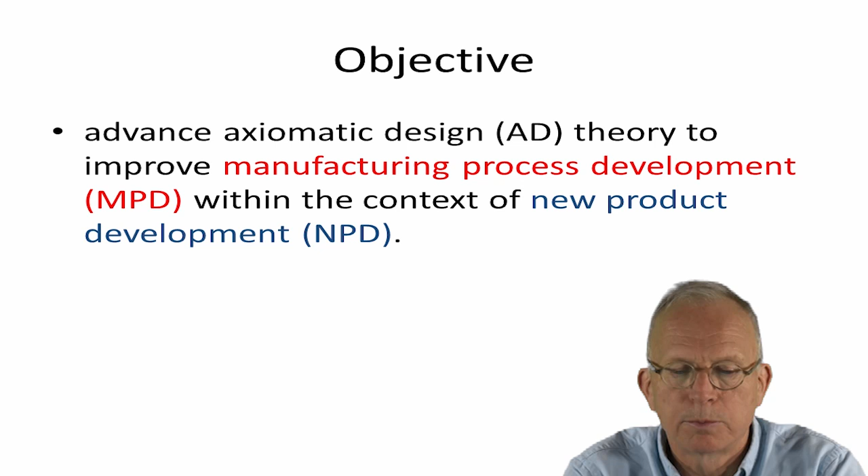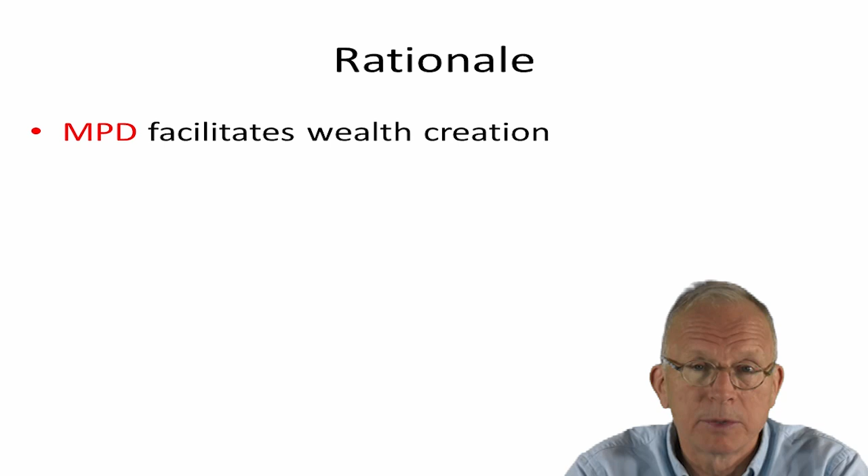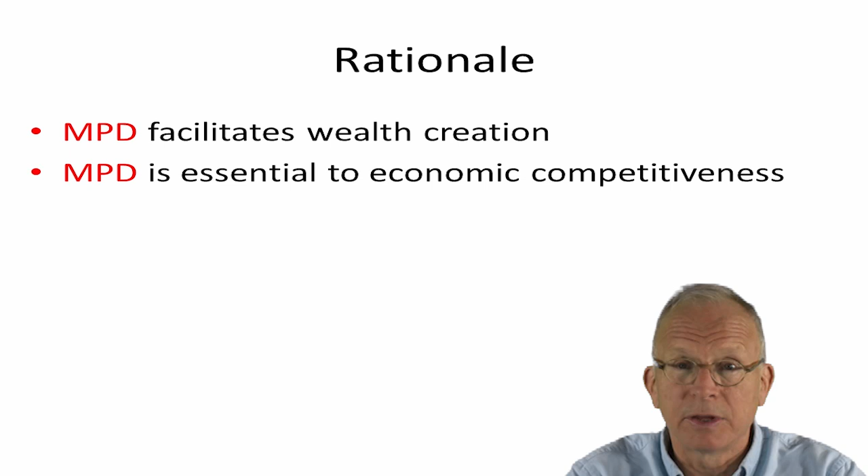This is important because manufacturing process development facilitates wealth creation. The better we do at developing manufacturing processes, the better we'll be at manufacturing, and manufacturing creates wealth. Manufacturing is key to economic competitiveness. If we can't do good manufacturing process development, we won't be competitive.

Traditionally, most of the manufacturing costs are already built into the new product before the manufacturing process development begins. This is unfortunate because it makes it difficult to manufacture things as cheaply as they could be otherwise.

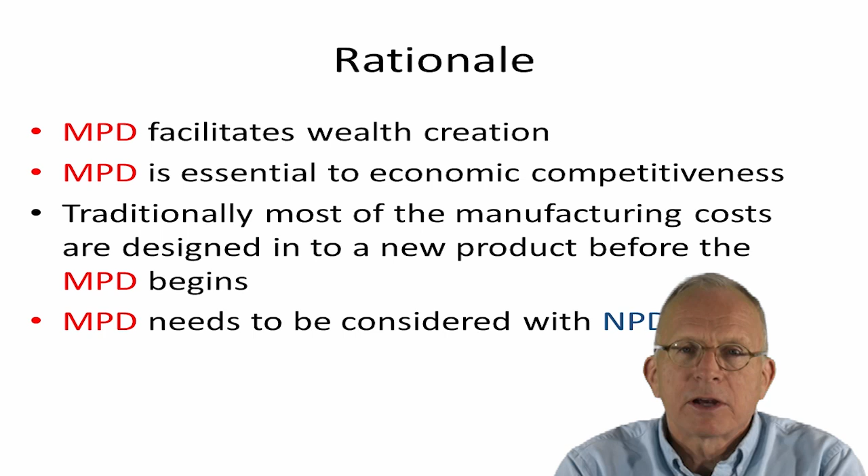So manufacturing process development should be considered along with new product development. The state of the art in this goes back to the 1980s when people started talking about concurrent or simultaneous engineering, meaning we should be doing manufacturing process design at the same time as we're doing product design.

This has been used extensively this way. The main thing is to get manufacturing engineers with the design engineers so that they could work together and make intelligent choices for the product based on the manufacturing process.

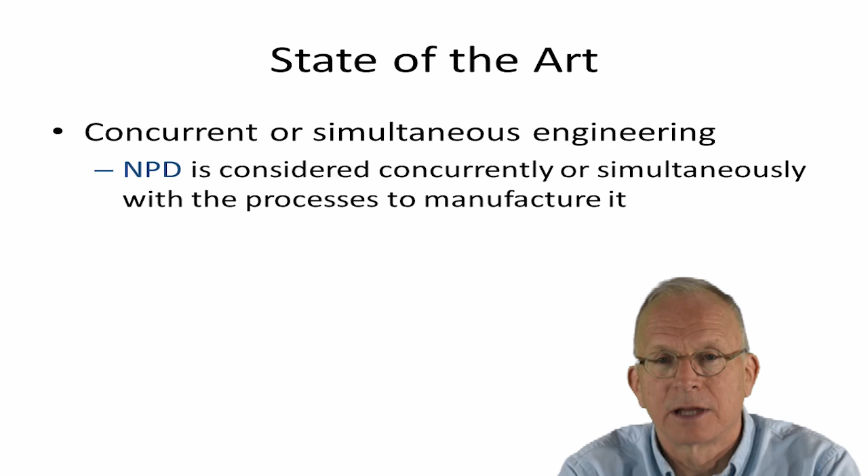So what we're going to be doing here is trying to advance the formalization of that in the context of axiomatic design and looking at different ways that this might be accomplished.

We're considering different configurations of the design domains and of the decompositions, trying to maintain independence and still be able to make the modifications. So we're here developing the theory of axiomatic design and extending the theory of axiomatic design.

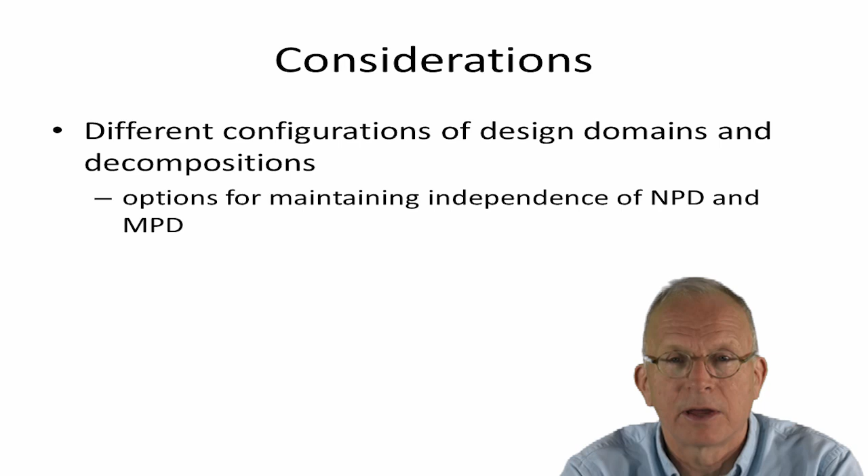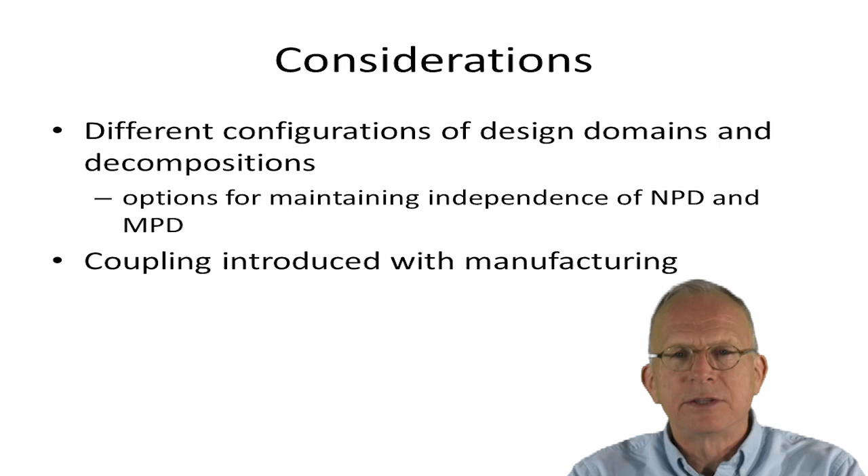So we can get into situations where coupling is introduced with manufacturing, and we can also get into situations where the manufacturing needs are not being considered when we formulate all of the process variables.

Another thing to consider is tool design. We don't always have the tools we need to make the products that we want to make, so sometimes we have to develop new tools along with new products and new manufacturing processes. We're going to look at how that could be formalized as well.

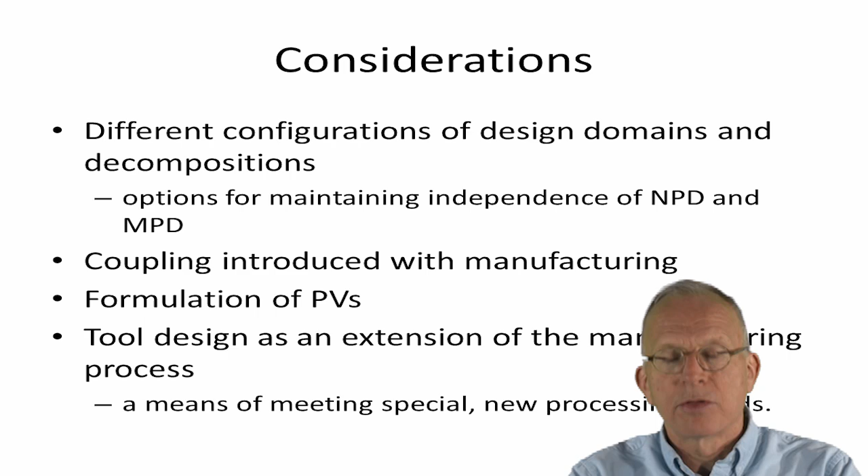First, though, let's consider an example problem that shows how coupling can be introduced into the manufacturing process development in the new product development. This is one of my favorite examples because I also do work on surface metrology, and this involves some interesting issues in surface metrology as well.

Rotating lip seals ride on shafts. This green element here is the rotating lip seal. It rides on a shaft, and what we're showing here is just half of it. It goes around the shaft, and the shaft is turning.

Things like internal combustion engines convert chemical energy to mechanical energy in oil-rich environments, and the oil needs to be retained inside the engine, but the power needs to get out, and we typically get that out through a rotating shaft.

Another place where these are used would be in hydraulic pumps. So the power, when we're getting it into or out of an oil-rich or fluid environment with a shaft, we need to maintain a seal around that shaft.

The roughness of the shaft turns out to be very important for the life of the seal, and so considerable work has been done on figuring this out.

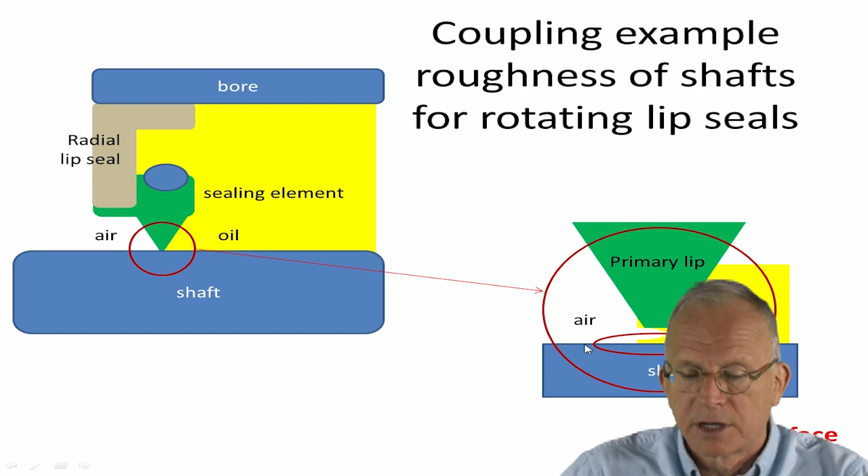The critical surface here that we're going to be studying is the surface on the shaft. Initially, the Rubber Manufacturers Association has 3 roughness criteria to specify the roughness of the shaft: average roughness, peak to valley roughness, and the peak height.

Your intuition on what these are probably serves you right. We have the arithmetic average, which is RA, and is the most commonly used roughness parameter. So we have 3 double-sided tolerances, making this one of the most toleranced rough surfaces there is.

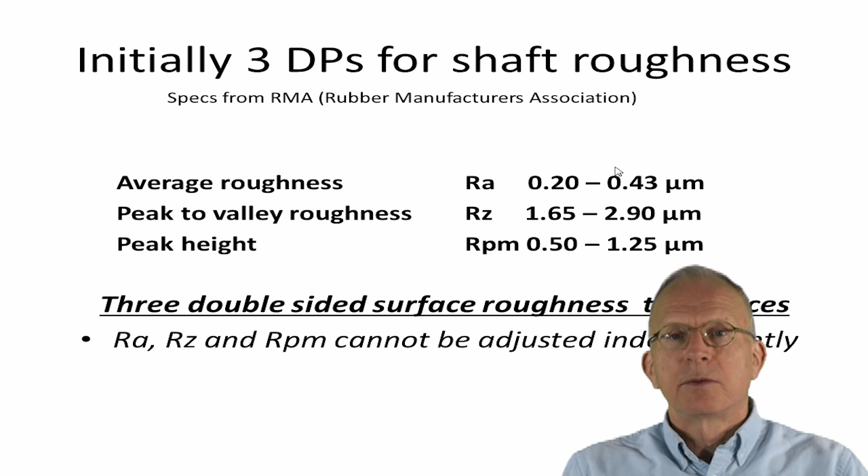Now the problem is that we can't adjust RA, RZ, and RPM independently. Let's see a little bit why. This is from a paper that I wrote about surfaces in 1990, and we're doing a cross-correlation matrix. We're looking at covariance here.

This was done previously by Nowicki from Poland, who suggested this as a way of looking to see what parameters might have more information about the surface that we would be interested in. Parameters that are highly correlated, for example RA and RZ, will have a high value here in the covariance matrix. So in this particular work, RA and RZ are highly correlated.

In fact, we can write an equation which is good to about 82%. In other words, if the R value is 0.9, we can square it and find out what percentage of the time RZ, the variation in RZ, can be explained by the variation in RA.

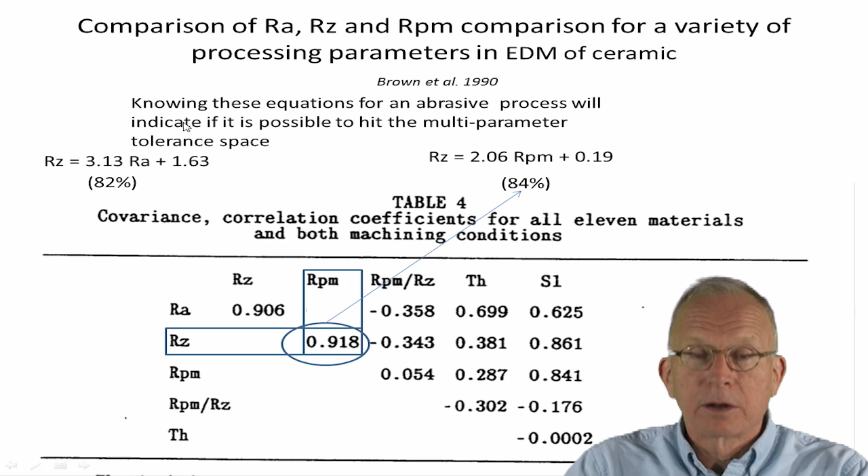Similarly, with RPM and RZ, those are also highly coupled, and we can also write a formula, and that's good for about 80 to 84%. So if it's possible to write these equations for the abrasive process we were using, it'll facilitate hitting this multi-parameter tolerance.

Let me illustrate how this works. So the peak to valley roughness is indicated here. Let's take another look at that. So this would be the RZ here, and then the peak height would be from the mean line to the top, which is the RPM.

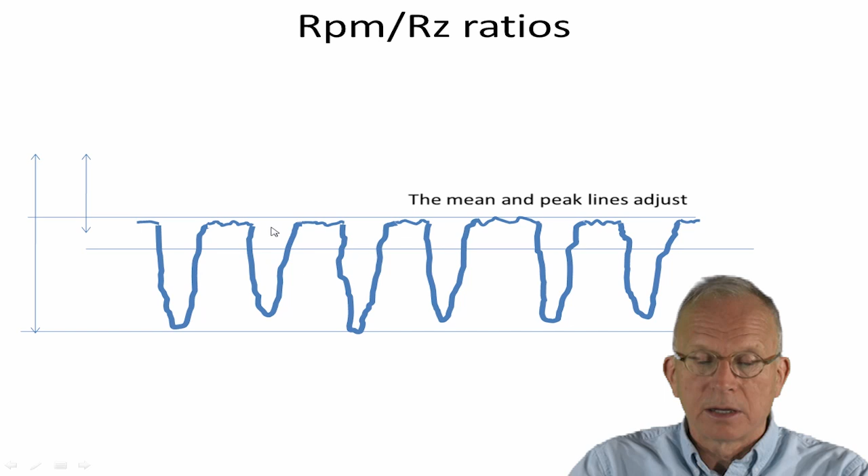If we, for example, remove the peaks, as we might on a honing operation of a surface that had a profile like this, then we would have this kind of surface. Now the mean line would have to be adjusted, but so is the peak height. So the RPM is very much smaller, and so is the RZ over here, the peak to valley. The ratio, though, is changed remarkably, and it goes from about 1/2 to about 1/4 in this case.

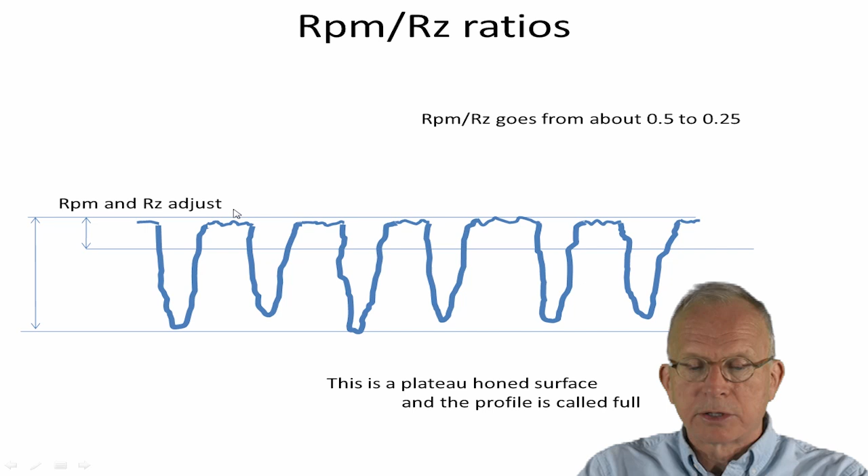And this kind of surface is called a plateau hone surface, and the profile is called full. It's a good surface for oil lubricated bearings, because the oil can go into the valleys and come out under pressure, helping to provide a hydrostatic interface.

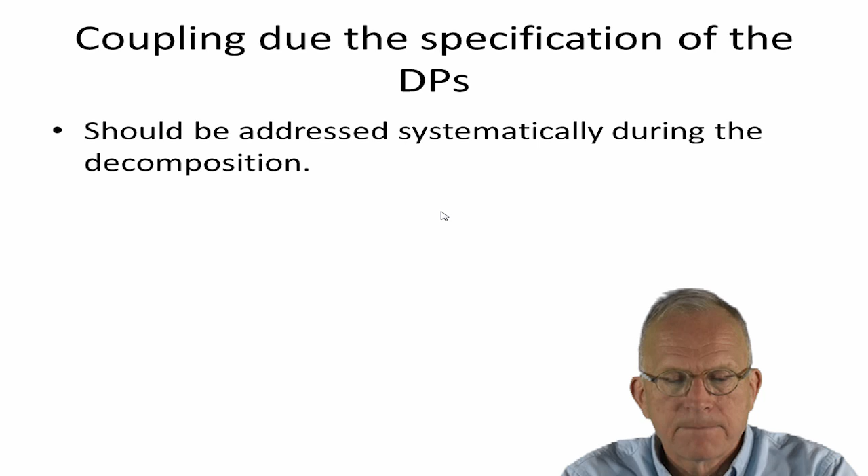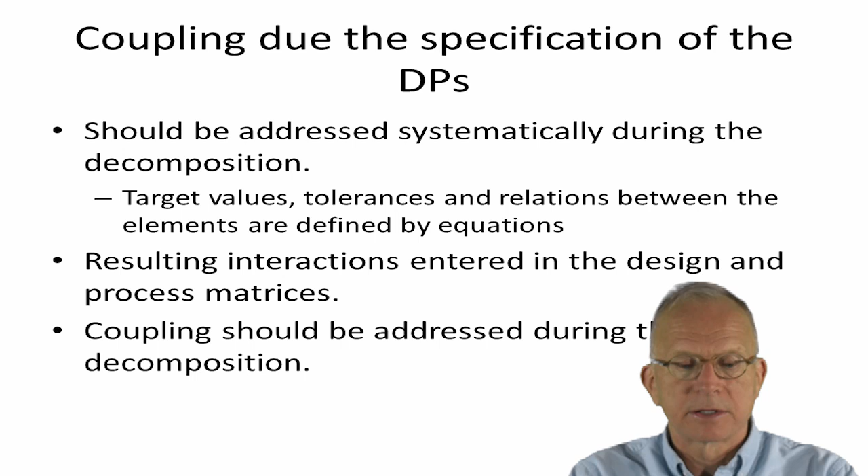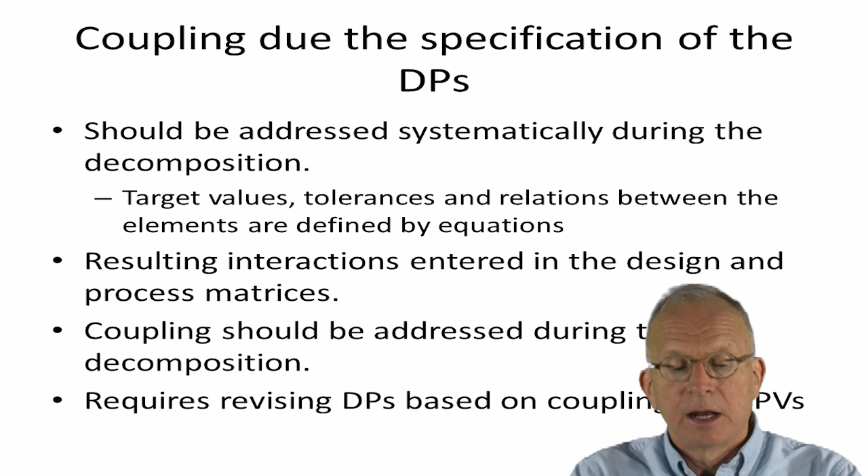So there's coupling, and because we can't change these independently, it needs to be addressed systematically during the decomposition of the design solution. To assist in that, target values, tolerances, and the relation between the elements should be defined by equations when we can do that. The resulting interactions can be entered into the design matrix and the process matrices, so we can see how best to manipulate those—we'll look at examples in a later module. So the coupling needs to be addressed during the decomposition, and it requires revising DPs based on the coupling with the PVs.

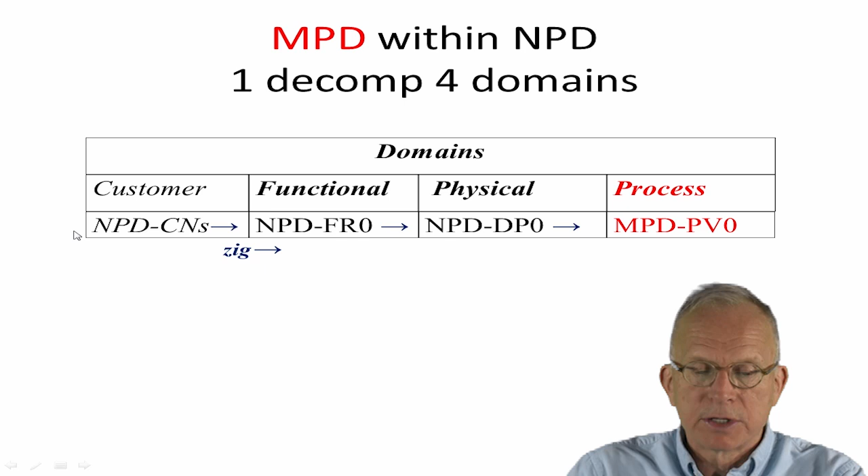So let's take a look at manufacturing process design within new product design: 1 decomposition and 4 domains. We're adding the process domain here. We zig over from the customer needs to the FR0, DP0, and then have a PV0, and this begins the manufacturing process design. Then we zag back across the physical domain all the way back to the functional domain, then begin another zig looking at the top level FRs, DPs, and PVs.

Then we would go down to the next domain, looking to see if any customer needs apply at this level, and we would continue like this until the design solution becomes obvious.

So we're co-developing the manufacturing process design, reacting to the physical. What we would have done in the previous problem would have been recognizing that we cannot change RPM and RZ independently, nor can we change RA independently of these. So we would go back across the zig and say, all right, we need to have a specification of the design parameters that will allow us to independently process these and produce them independently in the processing phase.

But let me go back here. In this particular case, there's considerable experimental work that was done to determine what the RA, RZ, and RPM values should be. And so then that would require going back to the experiment, actually going back to the way roughness is being defined in this case, to try to find new roughness parameters that would have this property of being independently adjustable in the process phase. And this is considerably more effort, of course.

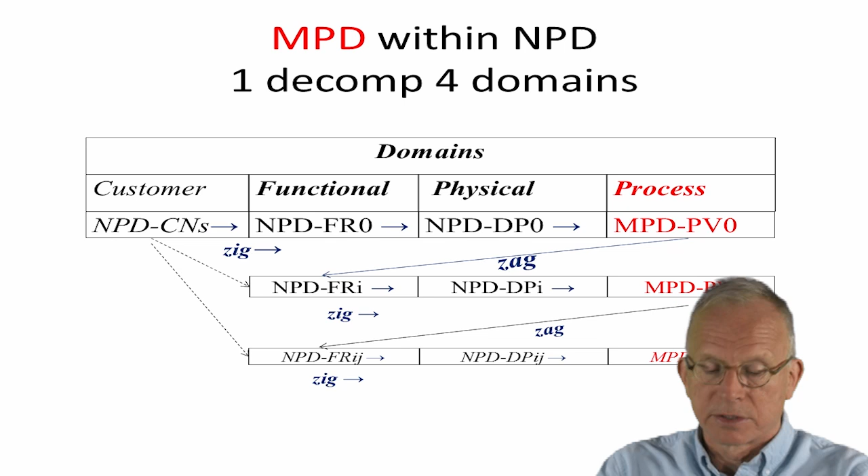So what are some of the difficulties? Well, the principal difficulty is there's nowhere to introduce the manufacturing requirements. And we previously discussed what manufacturing requirements are: manufacturing should add appropriate value and minimize cost. Now, I've shown minimize cost here as a selection criteria. After studying Thompson's paper, I think this is a better way to characterize the cost issue in manufacturing.

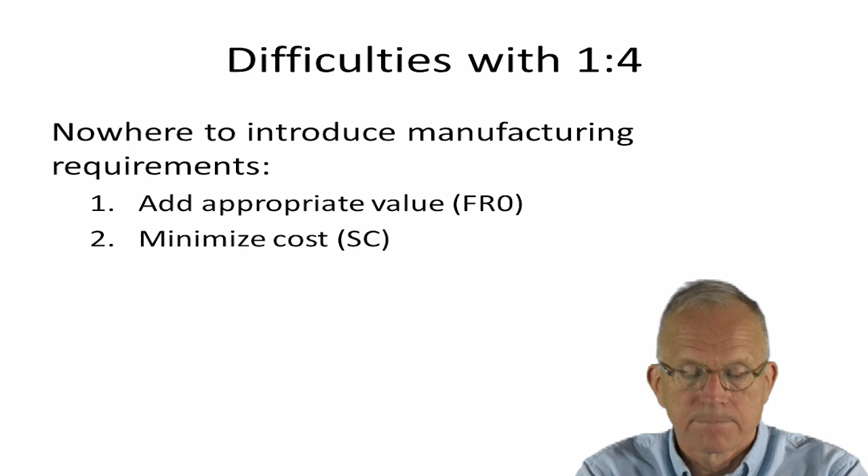So manufacturing process development, we could separate it then from the new product development in this kind of way. First we would do the new product development, going from the customer to the process to the physical domain, and we would stop with the DPs. Then we would zag into another decomposition. So this is 2 decomps.

Here we would start with the manufacturing process development CNs, which would be generated largely out of the new product development DPs. So we would use the DPs for the product to generate the customer needs for the process. And then we would develop the FR0 and the DP0 just as if this were a separate design, which in fact we're essentially doing. Then we can zigzag down to the lower levels, getting more detail on the manufacturing process. So here we've got 6 domains, and 2 decompositions. So essentially we could finish the new product development design decomposition before we begin on the manufacturing one.

Now, the problem here, if we think of the example of the rotating lip seals, is that there's no opportunity really to iterate back to the definition of the DPs of the surface roughness, which was causing the problem in the example. So this does not provide that kind of flexibility.

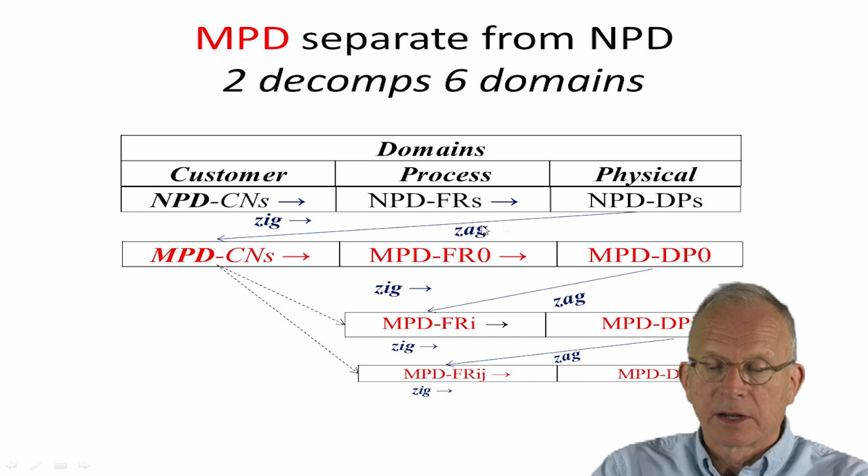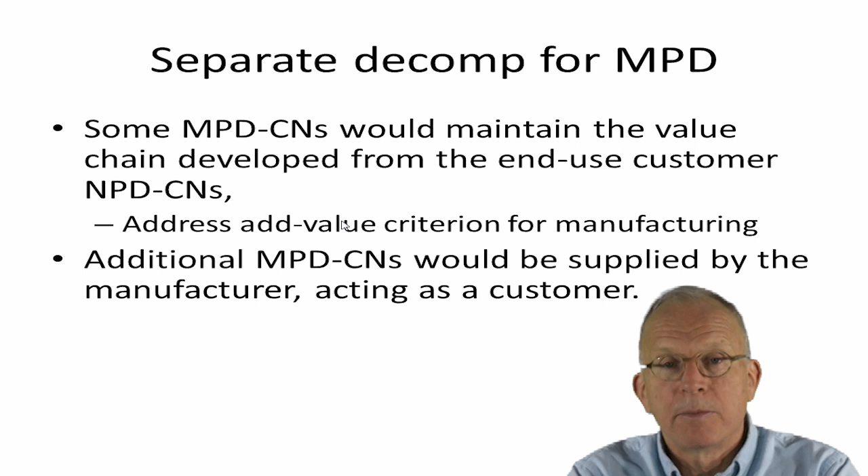However, we still need to trace the value chain back through to the end-use customer new product development CNs. We need to maintain those through the manufacturing process development so we don't lose sight of what's creating value. So we need to address the value added criteria in manufacturing this way. The additional manufacturing process development CNs would be supplied by the manufacturer, one of the stakeholders, obviously, acting as a customer or a stakeholder, as Thompson called them in this situation.

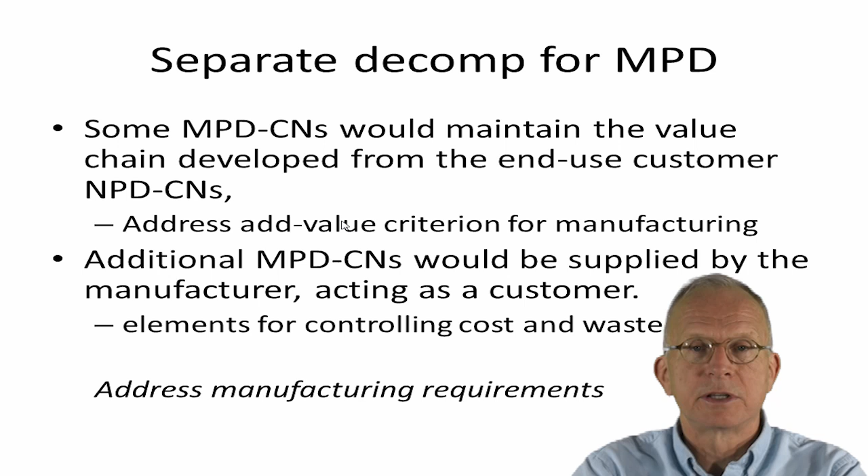So this would introduce elements for controlling cost and controlling waste. So therefore we would address the manufacturing requirements this way. However, we still would have the same sort of coupling with the shaft and with the roughness, and not have an ability to modify that.

So essentially what we have here is sequential new product and manufacturing process decompositions. And this gets back to the problem essentially that initiated simultaneous or concurrent engineering, that we finish the new product development and then throw the results over the wall to the manufacturing people. However, we do get a complete new product development for defining the needs of the manufacturing processes. And we could save iterations through the manufacturing process development when changes are only needed in the new product development.

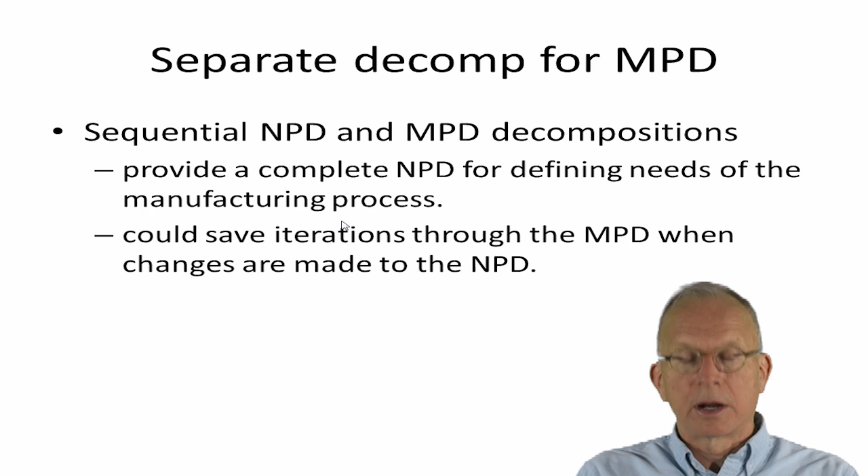The problem, as I said, is design couplings during new product development cannot be addressed in the manufacturing process development alone, hence the example on the surface.

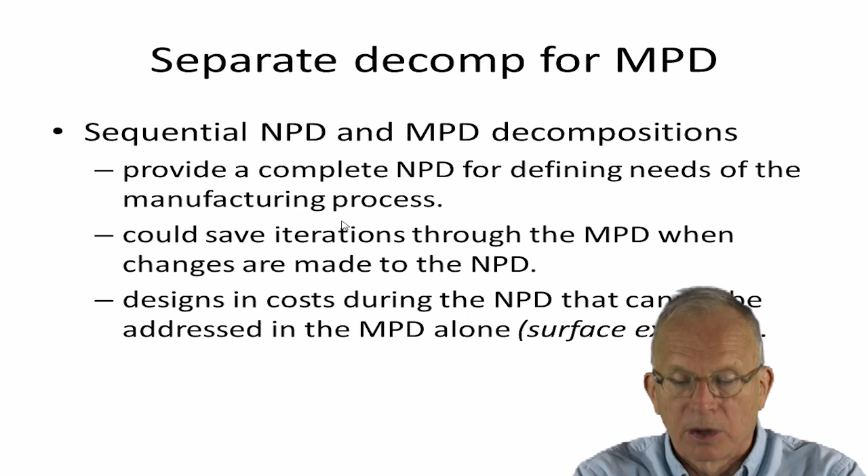Let's think about the problem of tool design, which follows from the manufacturing process design development. This would be important in cases where there are no existing tools for this kind of manufacturing process.

This occurs at times when, for example, integrated circuits were being developed. New tooling and new processes had to be developed to diffuse elements into silicon to produce silicon wafers. Considerable development was done at that time for the tooling.

Then we can develop the customer needs based on what the design parameters are in the manufacturing process development. From the FTD CNs, we could develop the FTD, the tool FR0, DP0, then go down to the FR at the top level, and the second level, and so forth, until the solution is obvious, continuing to decompose.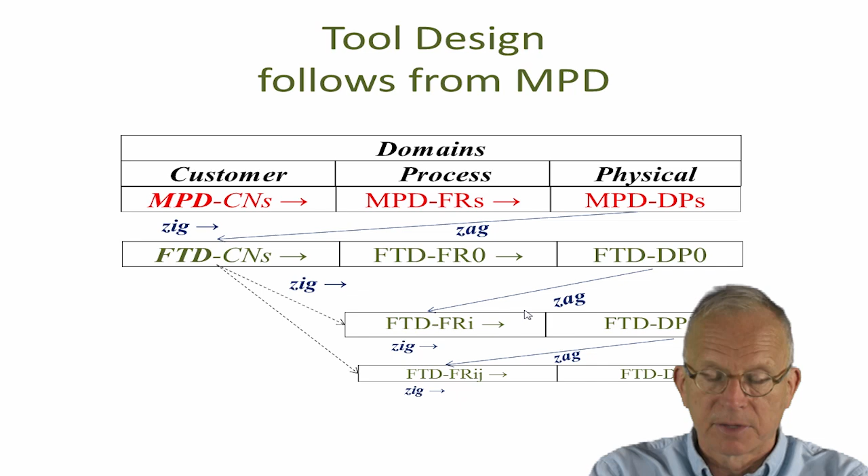Let's take a look at the PV definition. We've said a lot about what the FR should look like. We've noted that the DP should begin with a noun, because it's a physical kind of thing, or perhaps an adjective.

The new product development PVs should start with verbs. The process indicates an action. It's a process — applying energy to a workpiece to add value. Now, that's in the strictest sense of, say, a mechanical part. But also for modifying, say, an organization, this might require considerable energy, and we hope that it adds value.

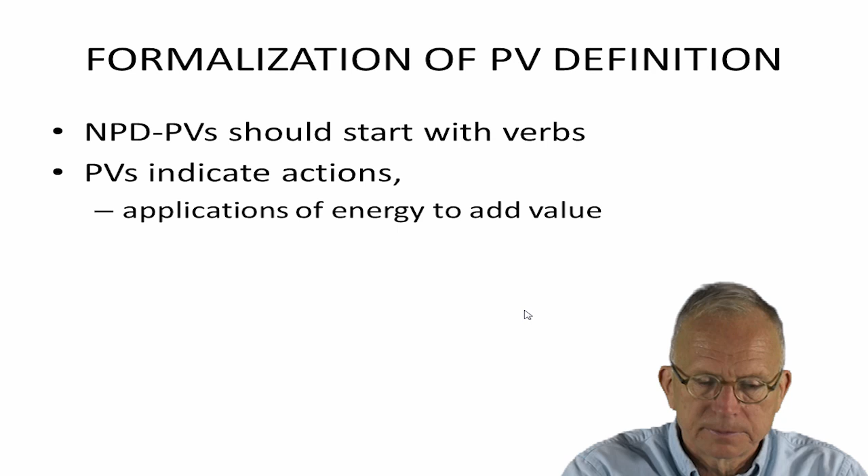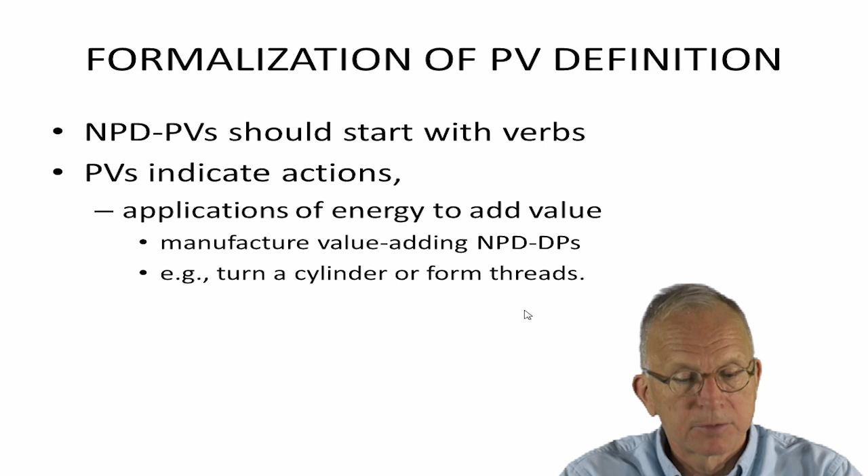For example, turn a cylinder or form threads. Let's take a look at these examples. So here's two different things. We may want to make a cylinder, for example, if we're making car engines. And there are so many places where we need threads.

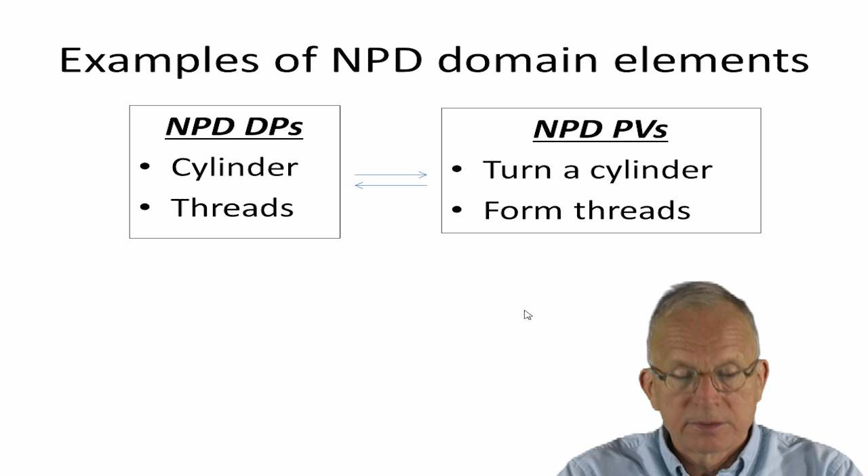So the DPs would be the cylinder to fulfill some function. It doesn't really matter what at this stage. Then the threads would also fulfill some function. So the PVs would be something like turn a cylinder and form the threads.

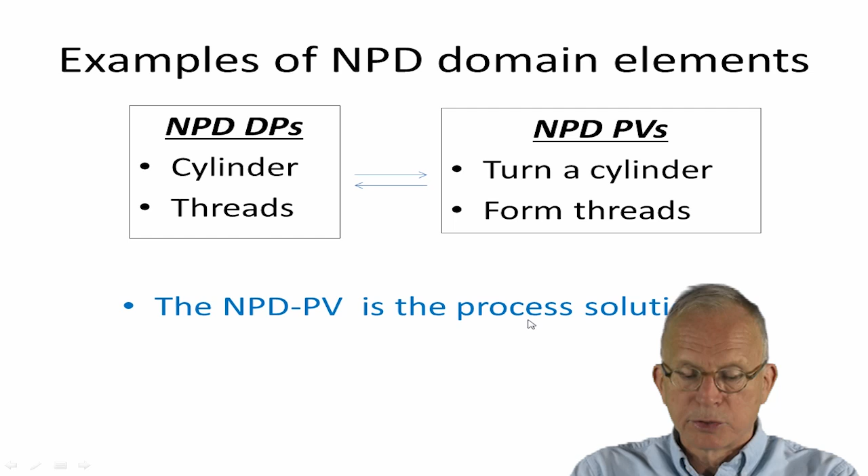So in a sense, this NPD PV is the process solution. So now we have the new product development design parameters, cylinder and threads.

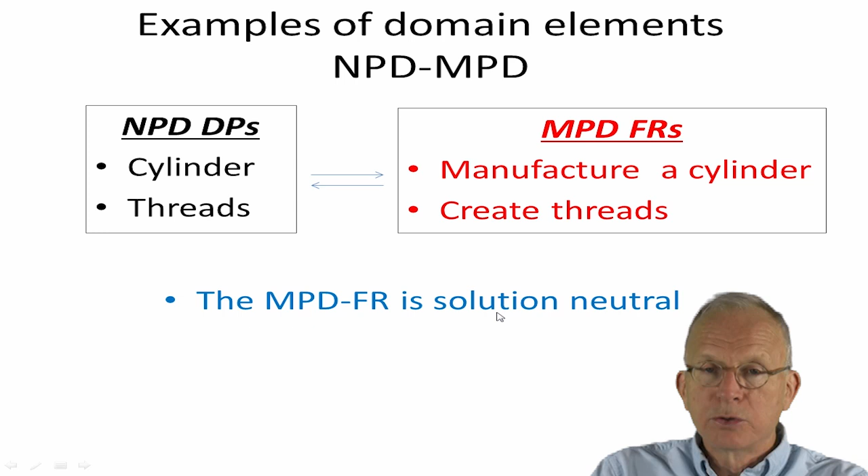And so we could say, well, what are the manufacturing process development FRs? Now they have to be stated like an FR. So: manufacture a cylinder, create threads. We need to state this in such a way that it is solution neutral, so the FR should allow us design space in which to choose different ways to do this.

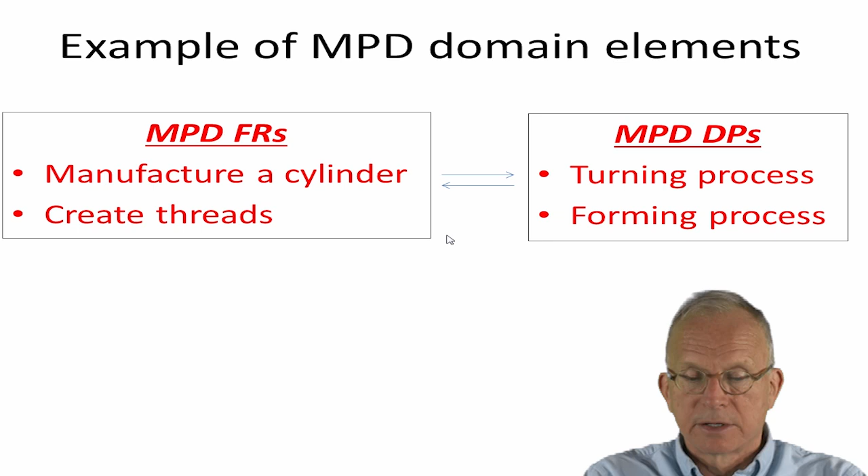So if we start with the FRs — manufacture a cylinder and create threads — we might select the DPs of a turning process and a forming process. So the MPD DPs indicate the nature of the process.

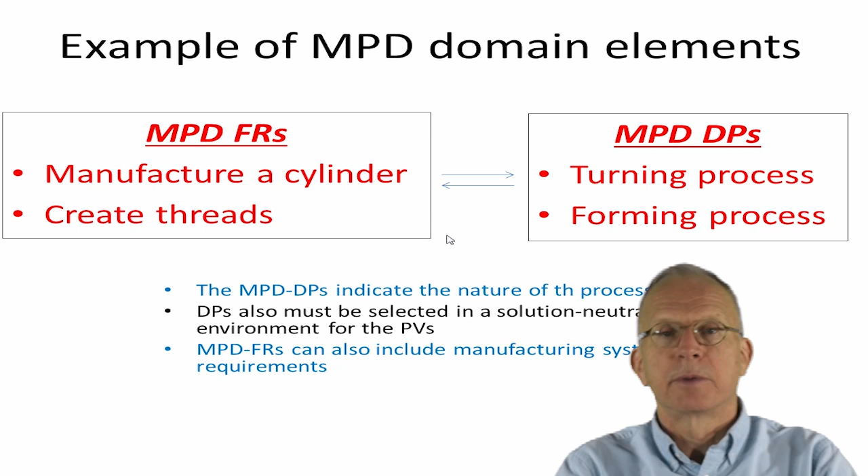The DPs must also be selected in a solution-neutral environment, so that we have a design space available for the process variables. And they might also include some manufacturing system requirements, as opposed to the more specific process.

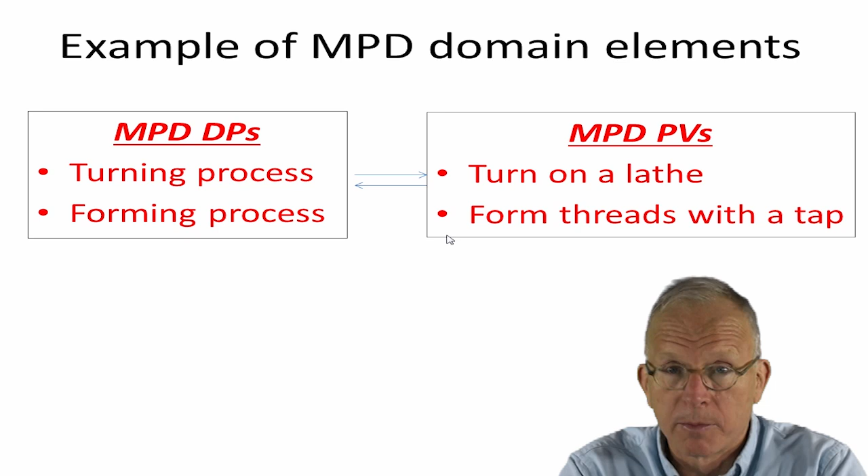So let's take a look at the MPD design domain some more. We might go from the DPs — a turning process — to the PV, turn on a lathe. For the forming process, to form threads with a tap. So we might have a thread forming tap, as opposed to, say, a cutting tap.

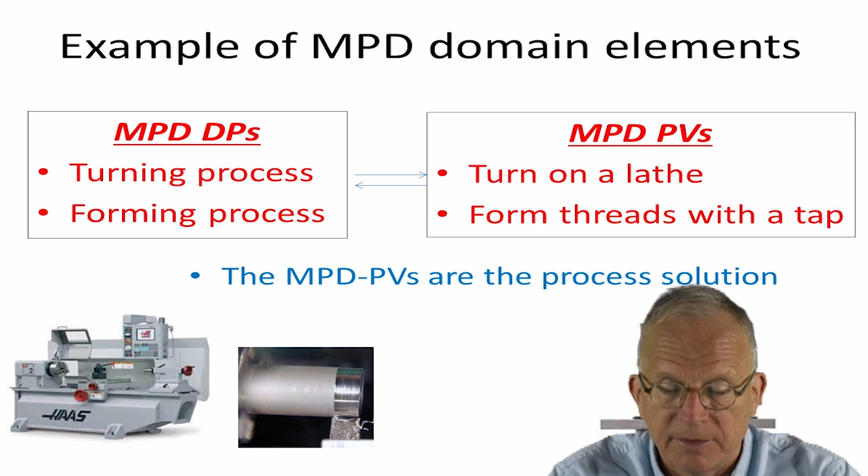So the MPD PVs are now the process solution. Design domains can be configured to address manufacturing process development and facilitate tool development. But the new product development DPs might have to be adjusted to eliminate coupling at the PV-DP level.

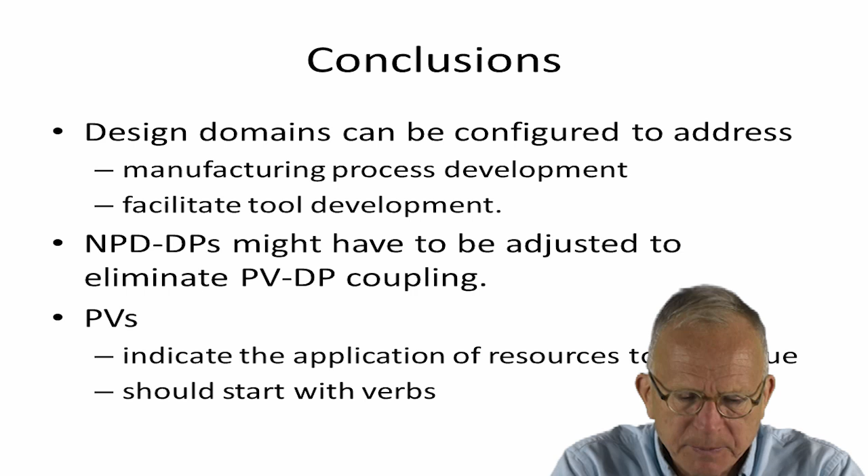And the PVs indicate the application of resources, energy for example, to add value, and they should start with verbs. Thank you for your attention.